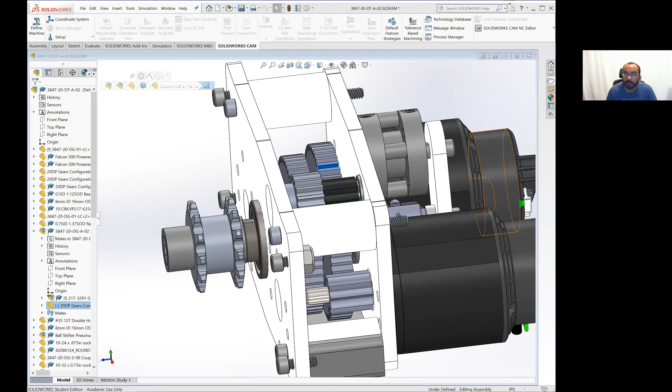This is the Falcon's pinion gear. We ran a 10 tooth this year, right? Yes, that is true, I believe that is true. And they go to a much larger...

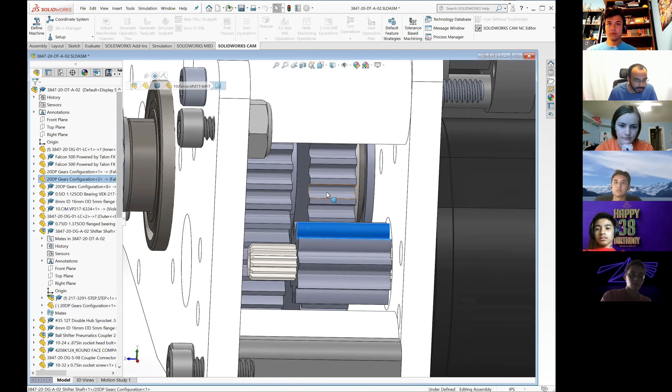Everything is in configuration, a 60 tooth ball shifter gear. And so if we don't worry about the shifting and we just sit in...

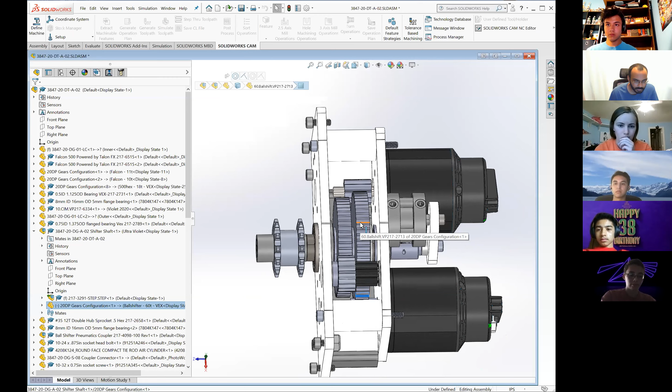Low, this is low gear, right? Yes. Yes, that makes sense. So if we just are always in low gear, we have this like 10 to 60 reduction to this sprocket that's on the shaft. So we're just getting 60 divided by 10, so we have a 6-to-1 reduction for this sprocket.

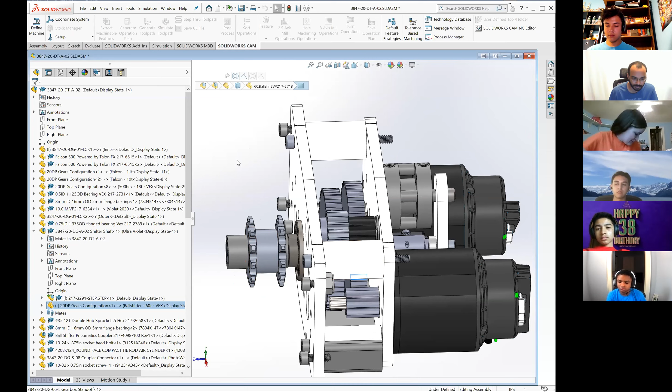And then we reduce again going from the sprocket to the actual wheel that has a bigger sprocket on it, to get to the final drive speed that we want at the wheel. But if we only want that low gear, it may not be fast enough for certain parts of the game where we want to be able to drive quickly across the entire field.

Most of the time we are driving in low gear. Most of the season we were driving in low gear. How often did we shift, Jack? I didn't shift very much. Yeah, especially in our first event, we didn't.

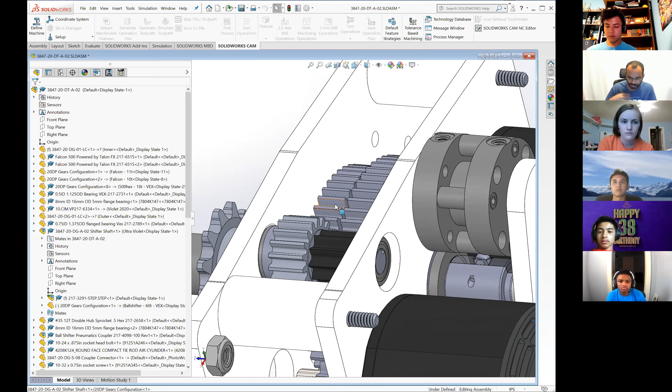Part of the point of having the shifter was that we can eventually get faster. So we allow our top end speed to, as we get better, as we practice more, we can just start shaving seconds off when we need to by being able to go faster.

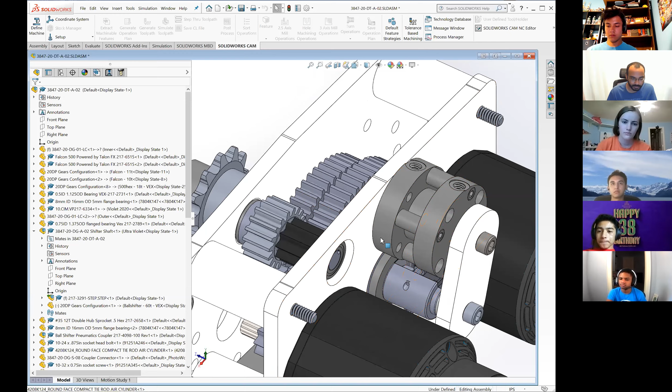So to be able to change gears, we have this pneumatic cylinder back here that pulls this little shifter coupler, and there's a little shaft in here that I'm going to show you in a second. It slides back and forth, and it chooses which one of these two gears is actually engaged and connected to the shaft. The other one is just able to freely rotate at a different speed than the shaft that this sprocket is on.

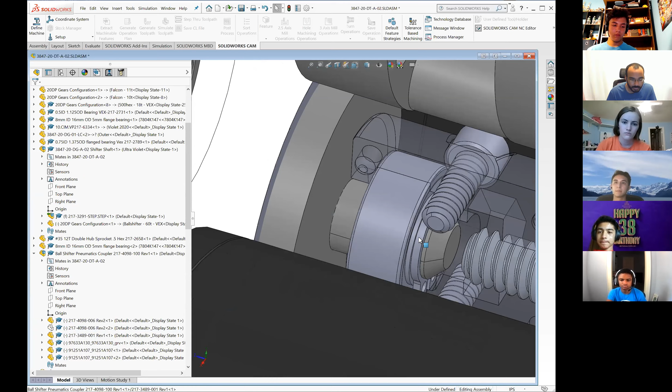Okay, so let's start looking a little closer. Start hiding stuff. So this shaft right here that has this bearing on it is the actual shifter shaft, and that's what's sliding back and forth. So as the cylinder pushes out, this whole shaft pulls with it. When it pulls in, it goes back in.

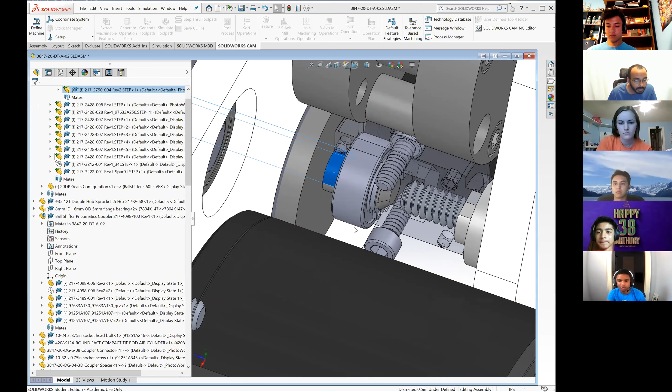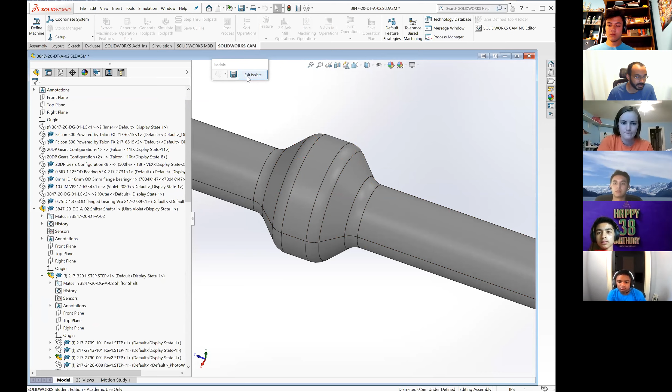If I isolate it, the shaft is an assembly, if you want to use that. Oh, I get what you're saying. Yeah, if I can pull out the whole shifter shaft. So this is what the little shifter shaft looks like. This raised bit is the important stuff, we'll show what that does in a second. Basically, this is how it chooses which of those two gears to actually engage and connect to the shaft so they're spinning together. So you're saying that, so this is an assembly. That would make sense.

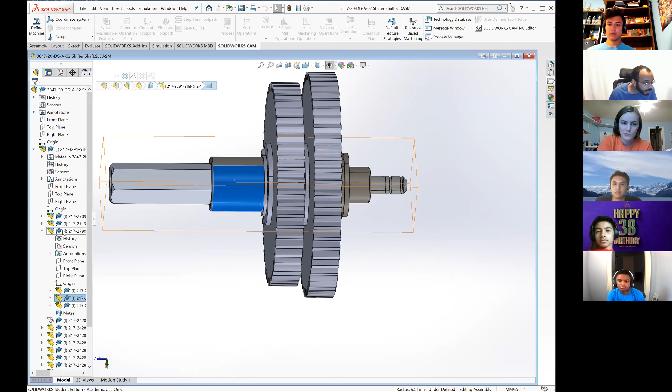So the shifter shaft itself looks like this with the two gears on it. The shifter shaft assembly is here.

So this whole piece is a piece of steel. It has a little socket for a hex shaft that goes into it and it's pinned, so we can't take this little piece of hex shaft out easily at all. So it makes everything rotate together, right?

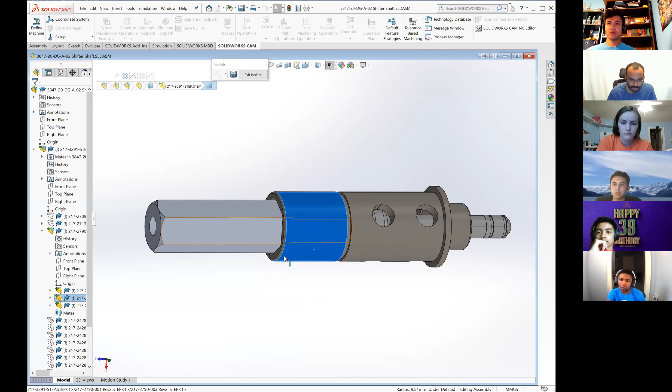And for it to be a ball shifter, this is where these little holes are, because there's actually 6 little ball bearings, one in each of these holes. And that's what engages or disengages the shaft.

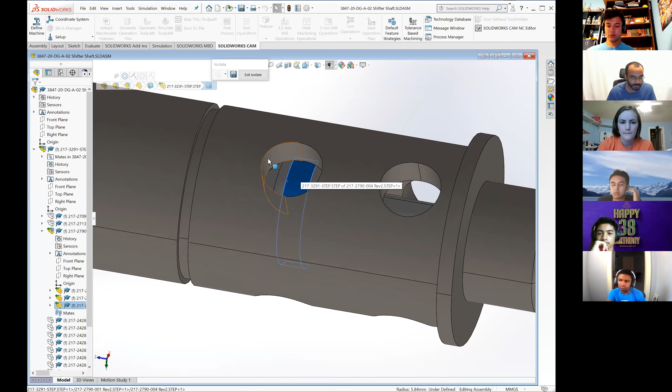So right now we would be in, for us, what's considered high gear, so our faster speed, because where this little bump is, the ball would be sitting up higher, compared to over here where the ball is basically inside this tube, and when it spins around, it doesn't have anything protruding out the top of it.

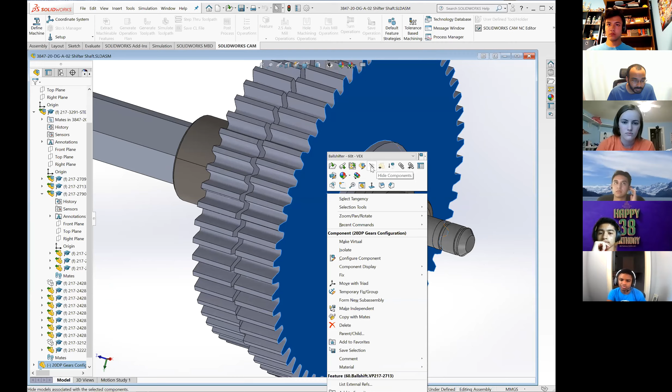I can't imagine we actually CAD'd the balls, right? I can't imagine we did. No? Yeah, that's just pulled from VEXpro. Oh no, they did, the VEXpro does have the balls. Oh, so you can see the balls are lower, right? So as they're spinning, nothing comes in contact, they're in the same plane as this circle.

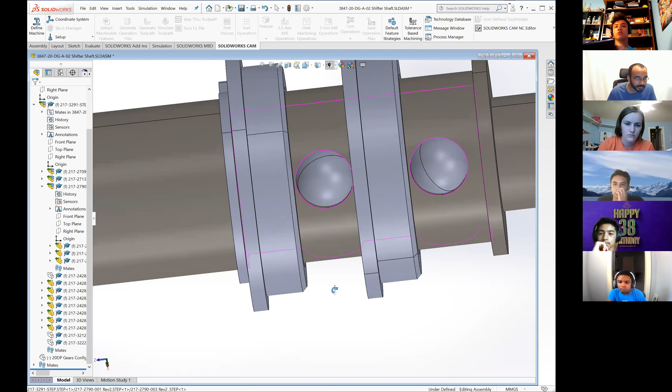But over here, if I hide this gear - oh, they didn't CAD them up, but it's fine. So in reality, these would be riding higher and would basically be sticking up out of this hole so that they're touching that gear. In a second - oh, where did the gear go? There's the gear, okay. That's a smaller gear, but it shows the same idea.

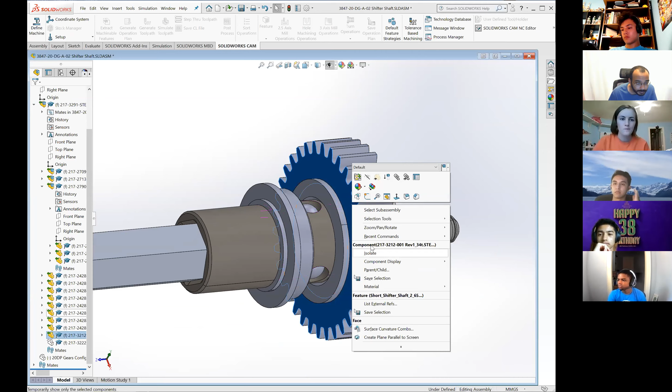So the gears themselves have this pattern cut into them, so the balls lock into these little spots on each of the gears. And that lets it, so it forces the gear to turn at the same rate as the shaft itself. Does that make sense? Yeah.

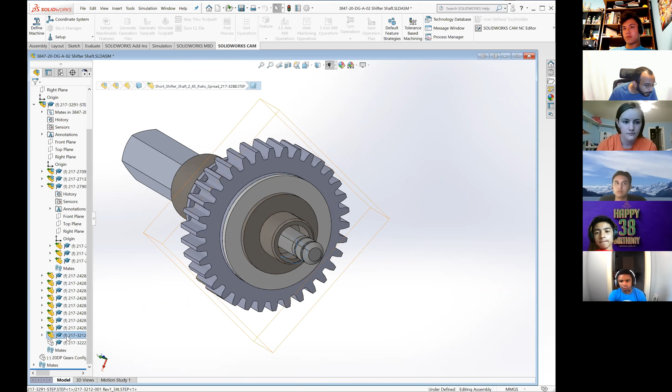Where'd the other gears go? Oh, the other one was the right one. Okay, I understand what happened.

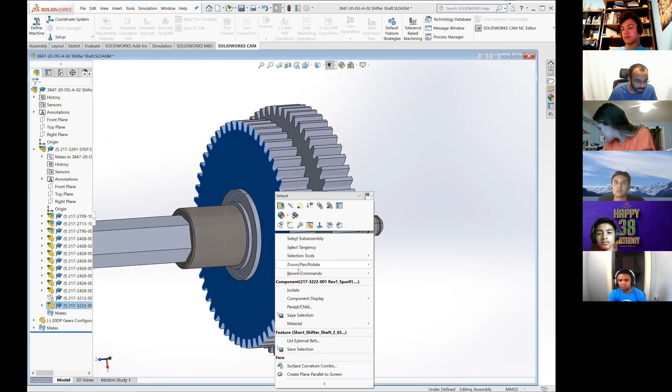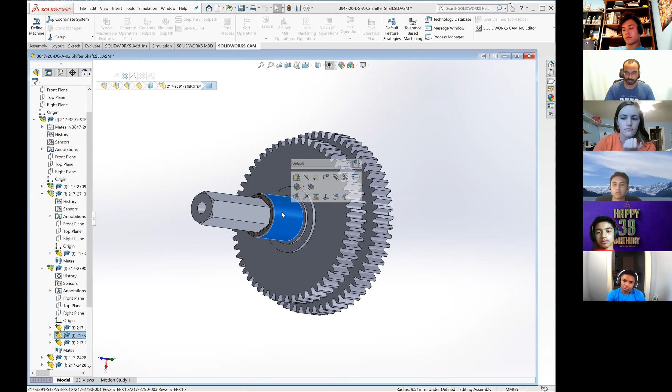So each of these gears has the same profile. When the pneumatic shifts in and out, one of the sets is engaged to the shifter shaft and one isn't. The back side of the gear has a bronze bushing on it, so when it's not engaged with the shaft, the gear and shaft can spin at different speeds without generating friction. There's a bushing in there that the gear is spinning on, so even if they're spinning at different rates, it still works and doesn't bind up or jam.

So that's the basics of how the ball shifter works. Basically that allows you to select which of these two gears is spinning at the same rate as the shaft, and you can change your output speed that way if your output is going this way.

You could also use it kind of backwards as what's known as a power takeoff. If you had motor power coming in through this shaft spinning it at some speed, you could choose which of these two gears to send the power to. So if you wanted your climber geared over here for one thing and something else geared over here for another, you could swap between those two things. That's how a power takeoff works using a ball shifter.

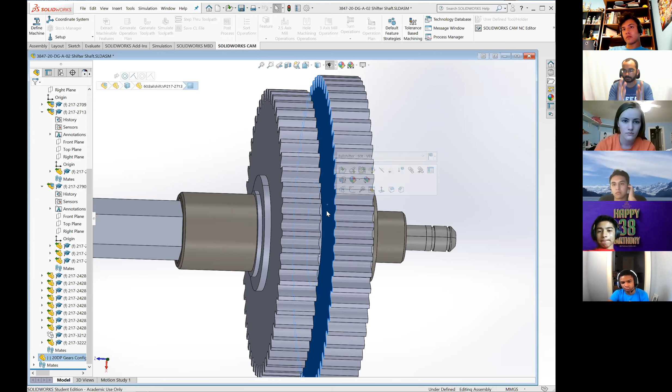The other way to shift gears, if you don't have the VEXpro ball shifter method with little ball bearings, is a dog shifter. Instead of ball bearings that expand into the gear, there's a gap between the two gears, and a dog with little key patterns grabs the gear on one side or gets pulled in and grabs the gear on the other side, choosing which one to attach to the shaft the same way, except it uses a bit more width to do it.

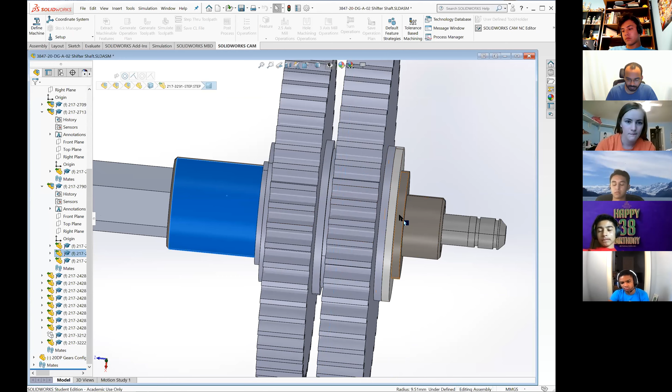You don't have to have this specialized hollow shaft or anything. It's still a slightly hollow shaft, but not as specialized as this one. They can do it just in a hex shaft to be able to have the thing move back and forth.

Our version of that, our setup for shifting this year, definitely takes a second to wrap your head around what we're doing. If I can come back to it, SolidWorks is being slow.

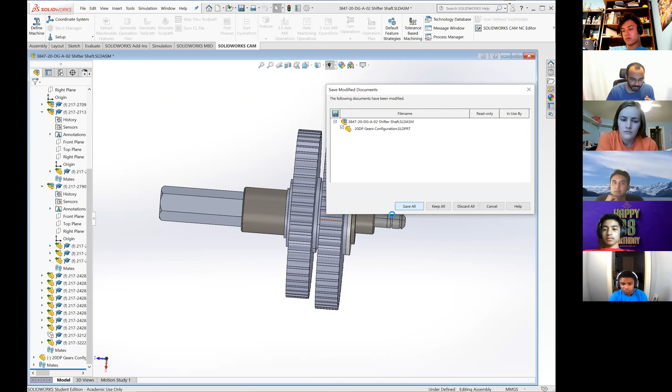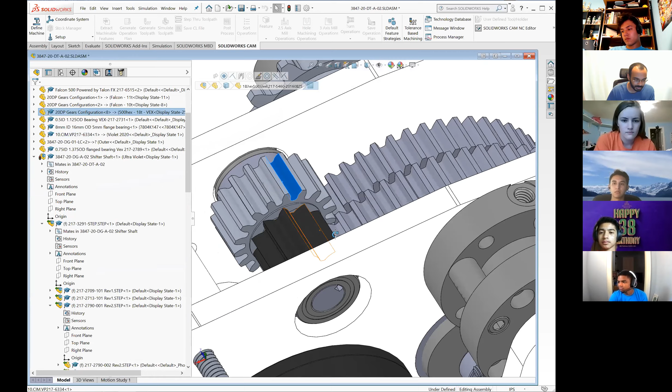As we were playing with it and realized we wanted to do this, we took a little while to figure out exactly how to do it and which gear ratios would work for what we needed, because we had to make this little shaft setup that Jack added that takes a separate pinion.

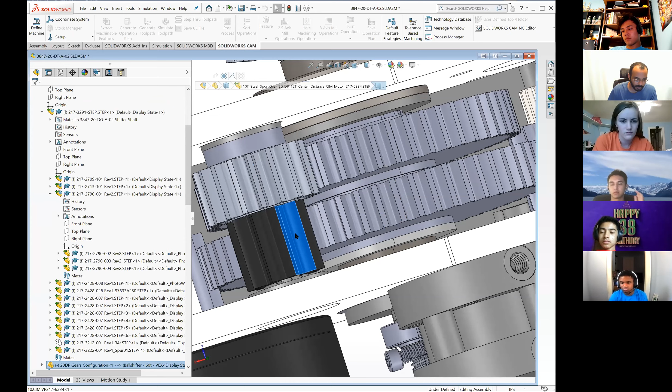This is a 10-tooth CIM pinion and an 18-tooth gear. It allows us to have this gear go from big to small, small to slightly larger, and then small to big, so we actually gear back up, basically making it so this gear is always spinning faster than this one.

Almost no one would want to do that normally, right? You'd rather use this whole second stage of gearing to get you more reduction. But because we have extra chain reduction going to our wheels, we were okay having our low gear be our main gear ratio, and having this one spin faster—it's not really like a turbo button, but it gives us a faster speed that we needed.

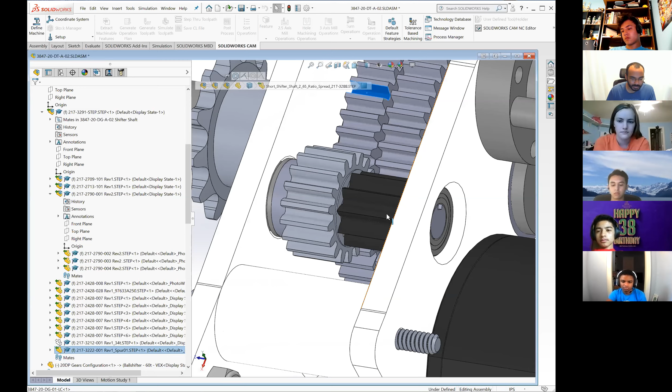To make this shaft, it's kind of weird. This is a CIM pinion, so it's on an 8mm steel shaft with a key, kind of like the same shaft that's on a CIM or a mini CIM. And then this gear...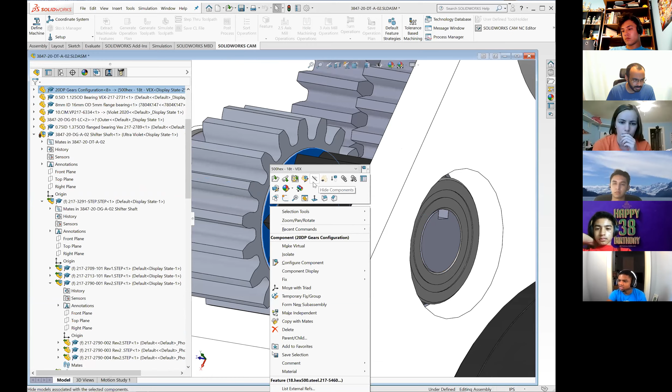has to be riding on an 8mm to 1/2 inch hex adapter, right Jack? Yes, there's a hex adapter here that has the inverse of the shaft in it. So this lets it ride on that same 8mm shaft as the pinion gear does.

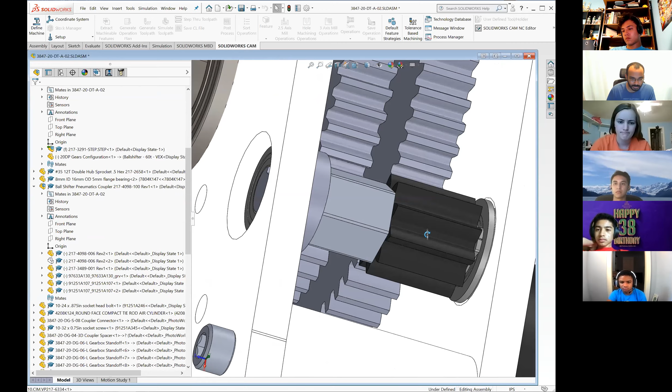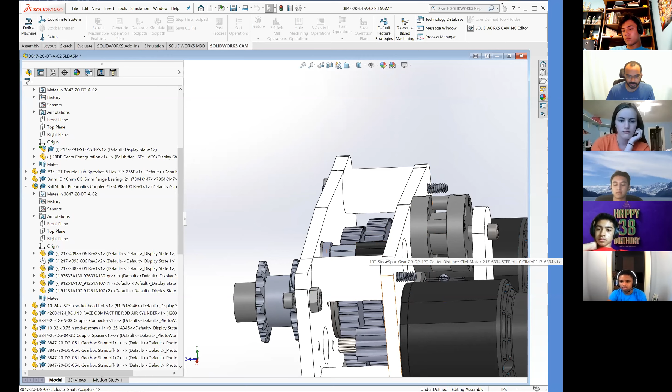So the whole thing can just get really compact and small compared to any of the other shifting gearboxes we'd ever built. It's not that much bigger than even just a single stage gearbox. Since you're only adding a little bit of width, you're not adding a whole other stage of gearing like we would normally do.

Okay, questions? Did I explain that well enough? Yeah, I think I get it now.

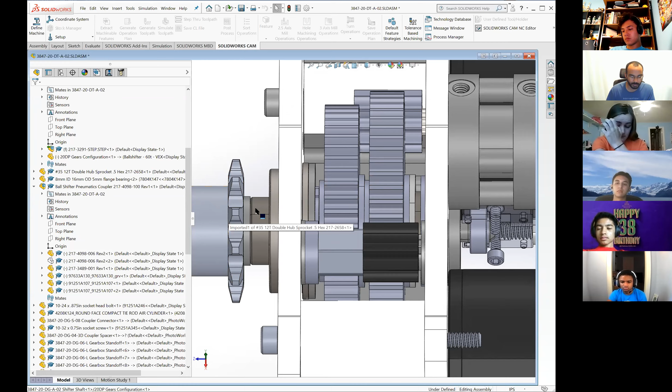The main point of a shifting gearbox is somehow you select between two gears and choose which one of them is going to actually have the same speed and torque as the output shaft, and then how you actually get power to both of those depends on how you set it all up.

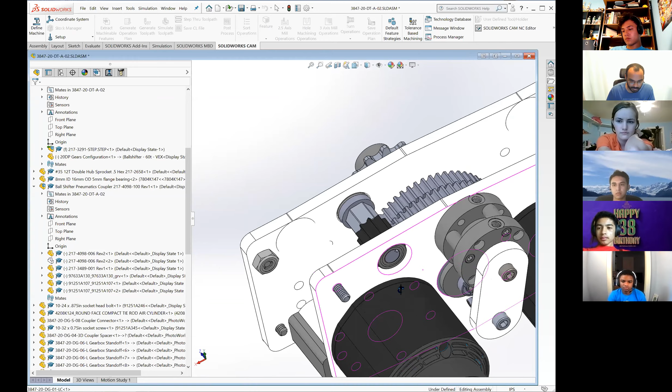This one is definitely a little bit more complicated than most people's, but it allows us to have smaller packaging, fewer gears, smaller gears, so it's a little bit lighter weight. Slightly smaller gears up here—they're larger on the actual shifter shaft.

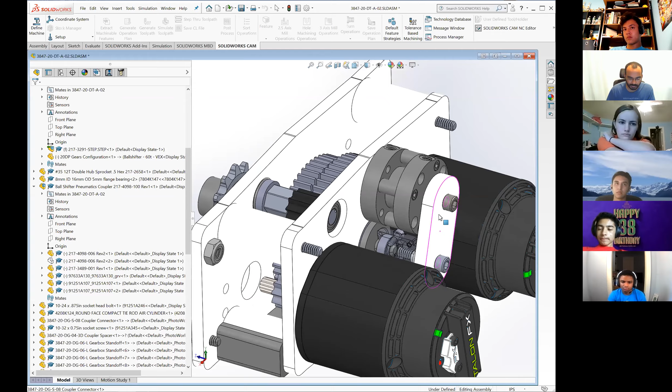A lot of times this cylinder won't be mounted with a plate, it'll be its own, mounted on standoffs and shifting directly in line, which is a little bit easier. But this has worked for us, so it wasn't too big of a deal—we were able to make that pretty easily. Okay, questions?